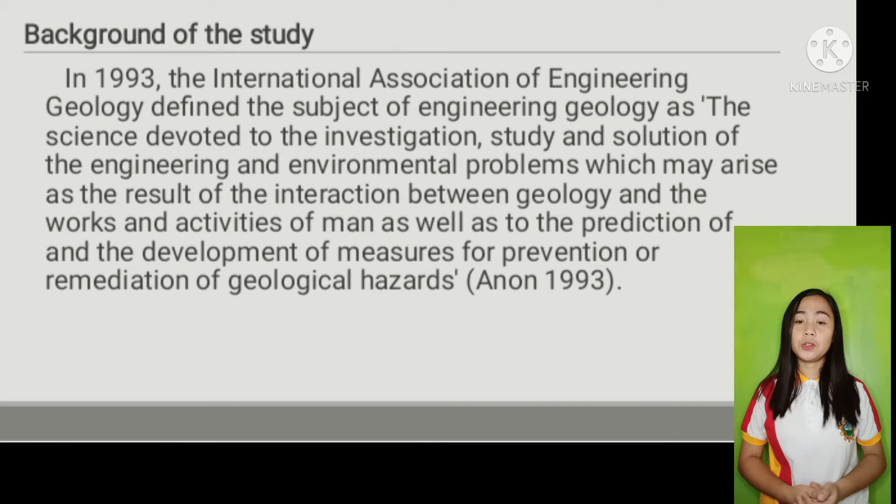The International Association of Engineering Geology simply says that this is all about the investigation of a particular conflict area and the study of its condition, and also coming up with the best solution of engineering, also the different environmental problems, as well as the activity of man, the prediction, and the prevention of geological hazards. In this case, it is very important that we have solutions to any geological hazards that arise.

So on the next slides, you're going to know more about geological hazards. The first topic is all about excavation. It is the action of excavating, o yung paghukay. It is formed through the development or construction of its foundations, tunnels, or underground.

The main importance of it is that the formation of excavation should be highly formed well, so its stability will stay at its most durable condition. So dapat matibay po, kasi once na hindi ganun kadurable yung slope, maaaring mag-collapse o gumuho.

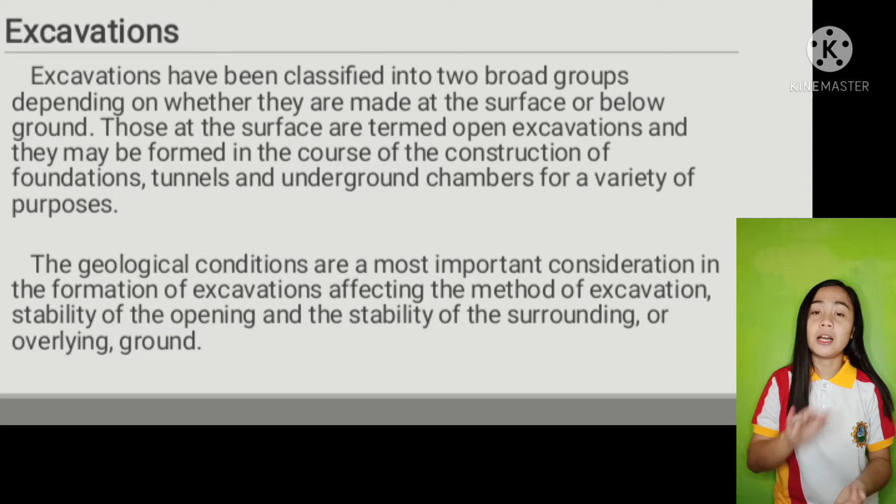So kailangan po na stable lang yung strength. According to Neil, it is specifically concerned with the ground conditions - yun yung pinaka-concern na yun sa mga grounds. So usually, in identifying hazard situations, yung mga panganib na pwedeng mag-occur that can cause harm during the excavation and construction, during doon sa pagko-construct ng excavation o yung paghuhukay ng lupa para mag-form ng slope o ng paggawa ng embankment doon. So all these concerns are related with the engineering geology.

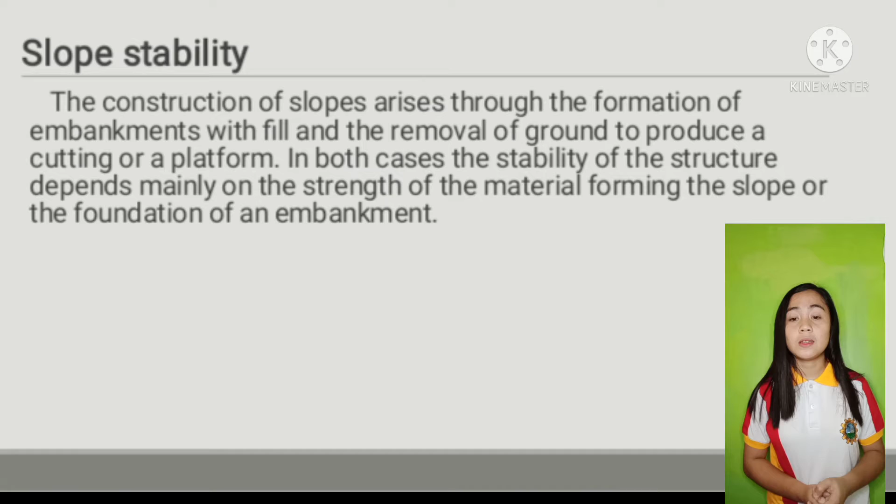Civil engineering works and construction industries mainly cover the functions, and the construction process in geology is very important. So the next topic is all about slope stability, from the word slope which is matarik o mataas, and from the word stability, for the things being stable.

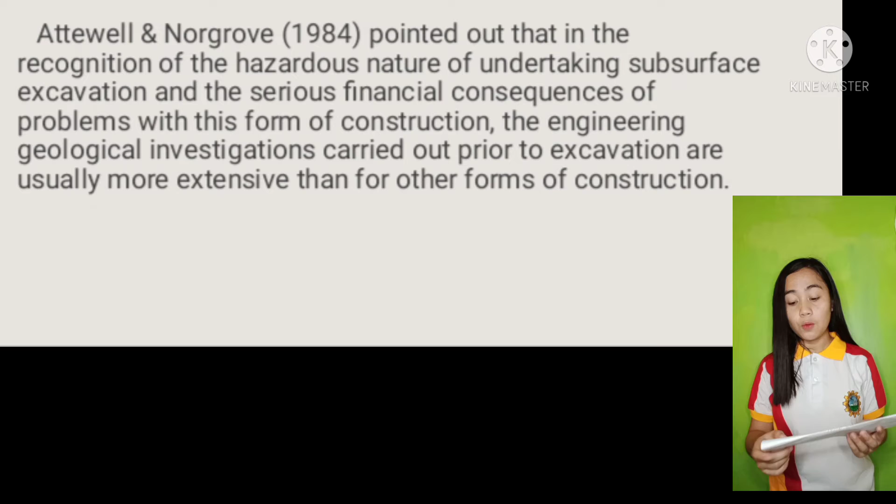So the construction of slopes arises through the formation of embankments with fill and the removal of ground to produce a cutting or a flat platform. Yung pag-construct nito is through the formation ng embankments o wall, yung nakikita natin sa gilid ng daan, yung mga matataas na part. Ito ay nagtataglay ng safety sa road na nagpe-prevent ng river flooding sa isang area.

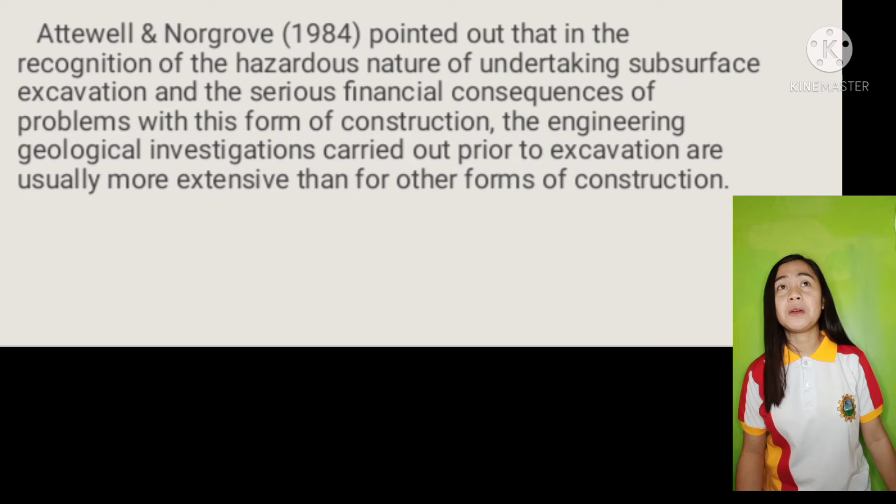Kinokontrol nito yung soil para maiwasan ang erosion o pagguho ng lupa, especially yung mga nasa gilid ng daanan na maaaring magkaroon ng harmful sa ibang tao. In forming the slope, dapat matibay yung pagkakagawa kasi nakadepende sa tibay nito yung foundation ng embankment para hindi mag-cause ng conflict o hindi gumuho yung lupa.

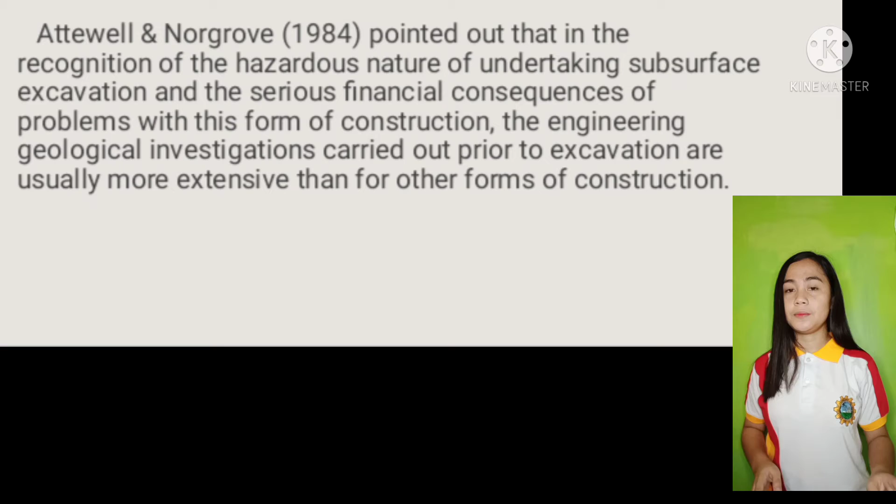For the method of excavation, the optimal excavation method for a given situation is determined by the ground characteristics, water conditions, and other elements related to the excavation sites. The equipment available for the actual process, as well as, if necessary, for sustaining the ground afterwards, may influence the decisions. There are two distinctions of excavation: the soft ground and the hard ground.

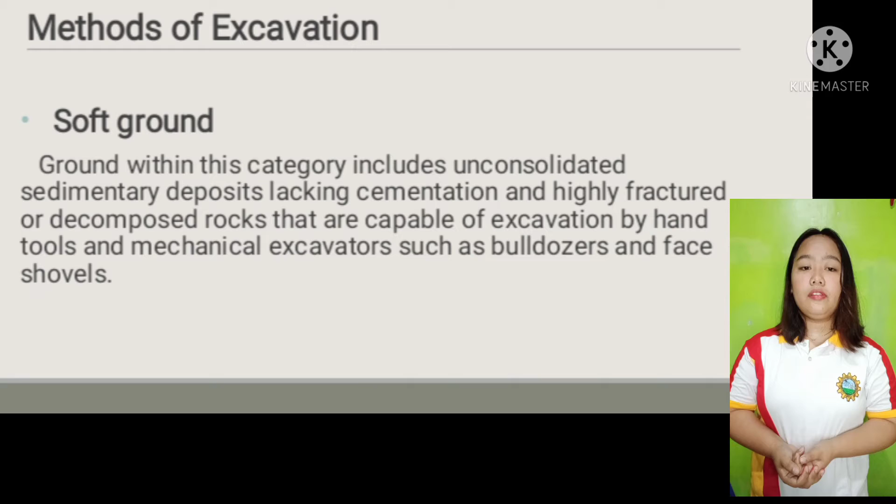For the soft ground, this category of ground includes unconsolidated sedimentary deposits lacking cementation, and highly fractured or decomposed rocks, which can be excavated using hand tools and mechanical excavators like bulldozer and face shovel. In this excavation, kailangan gumamit ng mga ripping techniques and other methods so that we can loosen the ground bago tayo mag-proceed sa paghuhukay.

Sa paghuhukay ng lupa, mayroong mga major importance sa pagpili ng mga gagamiting excavation equipment, and it depends on its strength, bulk density, bulk factor, and natural water content. But there is no generally accepted quantitative measure sa paghuhukay. The assessment is usually made according to the experience of the operator and to the behavior of the ground.

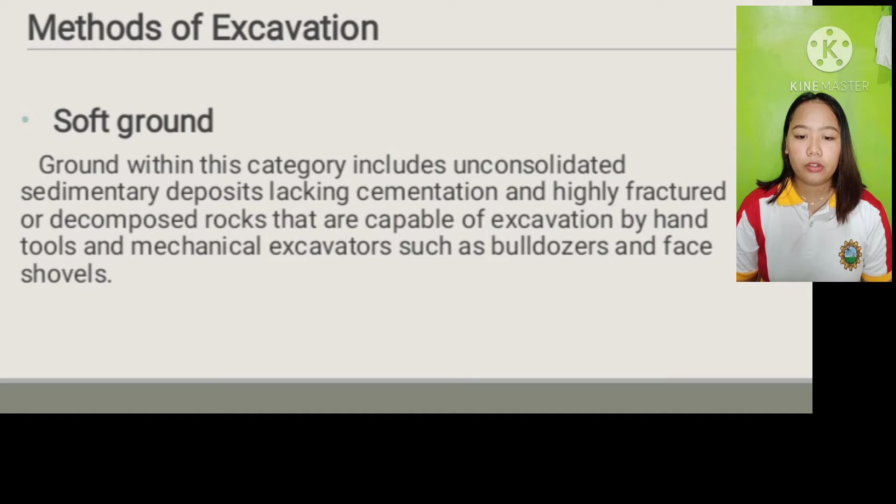According to Atkinson, the most common method to determine if a rock mass is capable of being ripped is seismic refraction. The practical limit for ripping is a seismic velocity of about 2 km per second. On the other hand, light blasting or hydraulic fracturing may cause a stronger ground to make it ready for ripping.

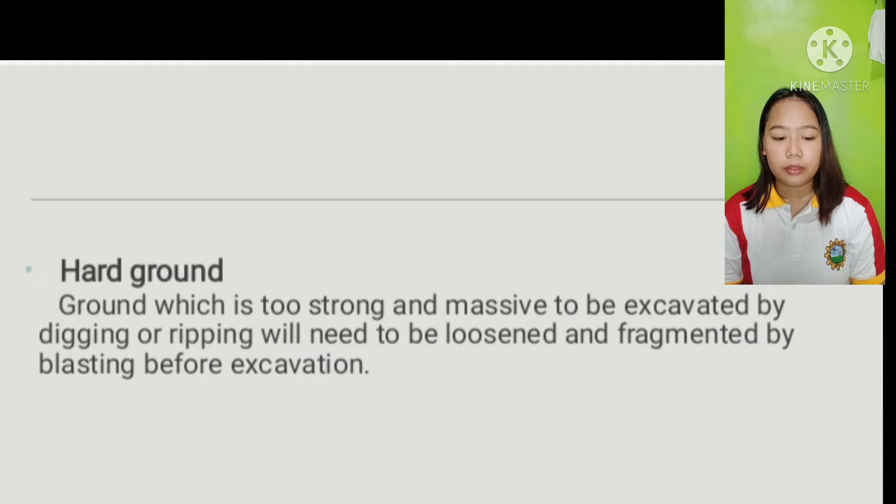Next is tunnel. Tunnel construction necessitates a significant amount of geological input. Maintenance of excavation stability, surface subsidence, as well as difficulties with excavation operations are all construction issues. The linearity of tunnels complicates the examination of the ground prior to construction. This is critical because even minor deviation from projected geological conditions can create delays and increase cost because the structure design and excavation and support methods will not be optimal.

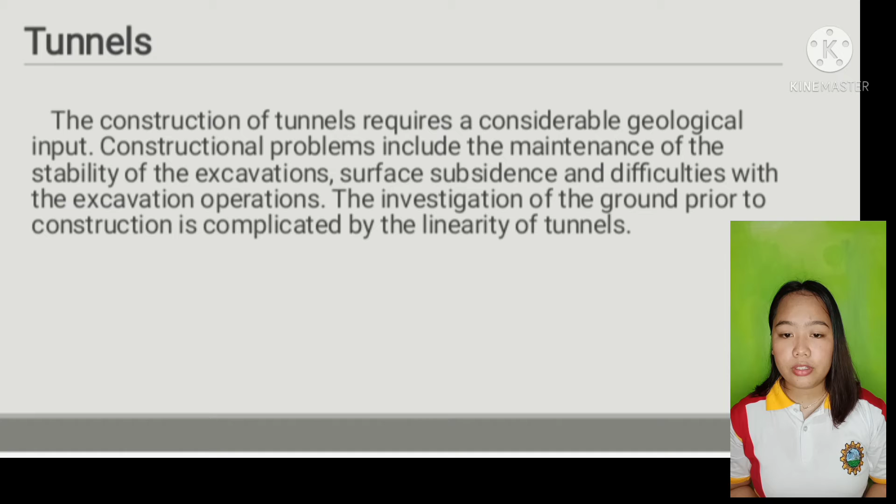Difficulties may also occur as a result of the presence of materials having unusual negative characteristics. For example, some rocks disintegrate easily during excavation, and the resulting slurry can be difficult to remove from the excavation if the circumstances are damp. When undesirable features run parallel to the tunnel alignment rather than crossing it at a steep angle, the situation is generally more serious.

For machine tunneling in hard rocks, mechanical cutting using tunnel boring machine or blasting is used. The performance of the tunnel boring machine is more sensitive to changes in rock properties than conventional drilling and blasting techniques. Aside from ground stability and support, cutter wear rate and penetration rate are also important economic factors in machine tunneling.

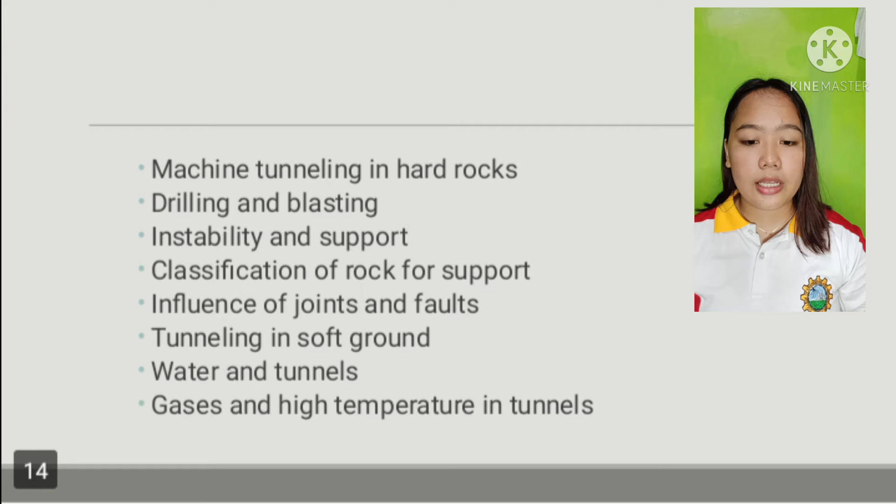Drilling and blasting may harm the rock mass depending on the qualities of the rock mass and the blasting techniques used. This may increase the need for ground support, also the amount of water that enters the excavation. This can be a reason for compromising the stability of what is being excavated.

Next is instability and support. The length of time that an unsupported rock mass can survive in a tunnel is mostly determined by the size of the stresses within the unsupported mass.

The size and shape of the tunnel in relation to the intact strength of the rock mass, the nature of the discontinuities, the geostatic stress regime, degree of overbreak, the groundwater pressure, the method of excavation, the length of time before placing the permanent lining, and the stiffness of the lining system, all influence rock pressure on the tunneling.

For the classification of rock for support, the classification of rock masses allows the determination of the most appropriate method of excavation for the rock mass in question, as well as the design of the kind of tunnel support. This classification is based on the fundamental qualities of the rock mass, and it must be relevant to both drill hole core and direct observation of the rock mass.

The rock mass quality, together with support, pressure, and dimension, and purpose of the underground excavation, are used to estimate the type of suitable permanent support.

The next one is influence of joints and faults. If the orientation and type of the discontinuities are outside of the expected ranges, unexpected instability may emerge. Overbreak can cause issues such as excessive handling and the need for backfilling. But instability can also be a hazard during construction.

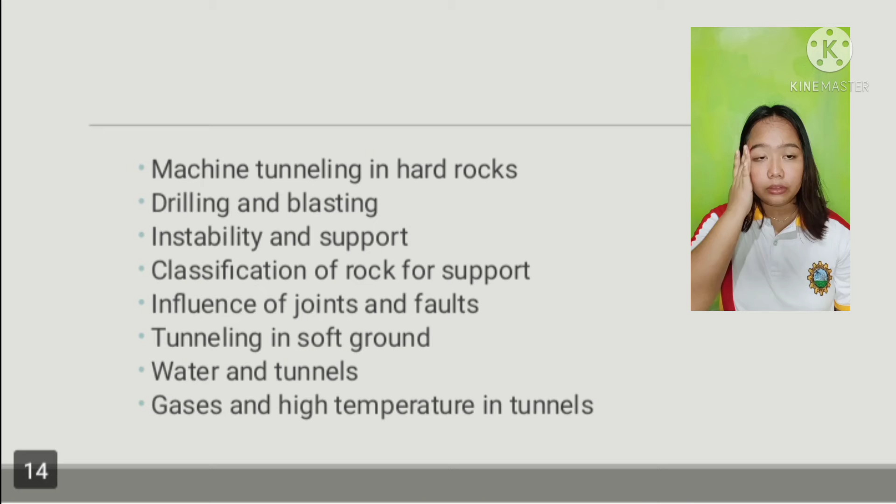Next is tunneling in soft ground. In soft ground, immediate ground support is critical. Hence, tunneling is normally done with a shield. This shield is a cylindrical drum with a cutting edge around the circumference that is pushed forward as the digging progresses. The excavation can be performed by either manual or mechanical means.

The next one is water and tunnels. Tunnels and other underground openings in water-bearing ground face numerous challenges.

It is vital to guarantee that sufficient pumping capacity is available to deal with the continuous input of water in excavation, and any sudden and unexpected water inflows that would result in flooding.

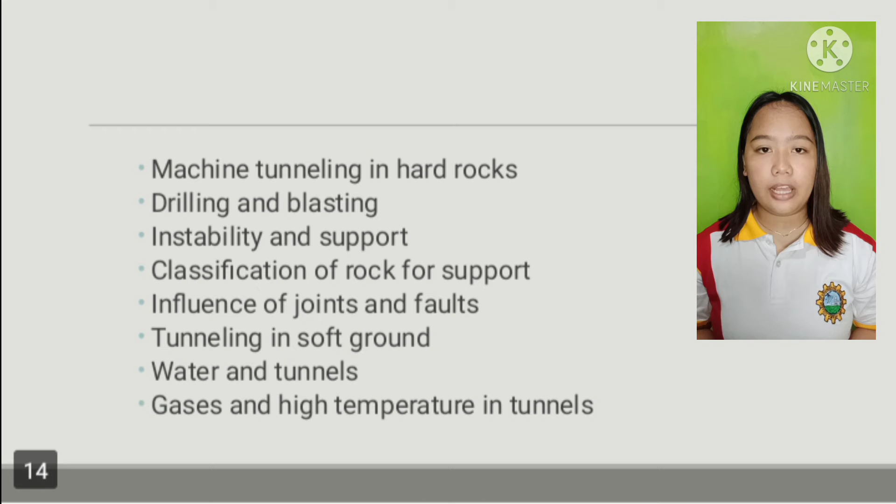Measures to control water infiltration, such as general lowering of groundwater levels in the area and ground treatment, may be done if the flows into underground excavation are excessive.

The last one is gases and high-temperature tunnels. The pore spaces in rock can be occupied by naturally occurring gas. If this is kept under pressure, it may rupture into subsurface workings, triggering explosive rock failures. Maraming gases na magiging hazardous if they come into contact with tunneling equipment.

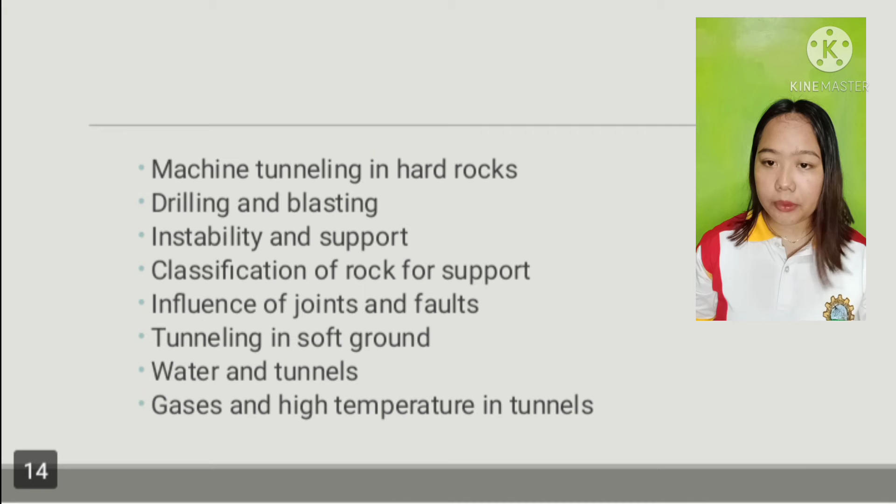For example, methane is an inflammable and explosive gas that occurs in many formations, including coal measure strata. Also, other examples of gases are carbon dioxide, carbon monoxide, sulfur dioxide, and hydrogen sulfide, which are toxic and very hazardous.

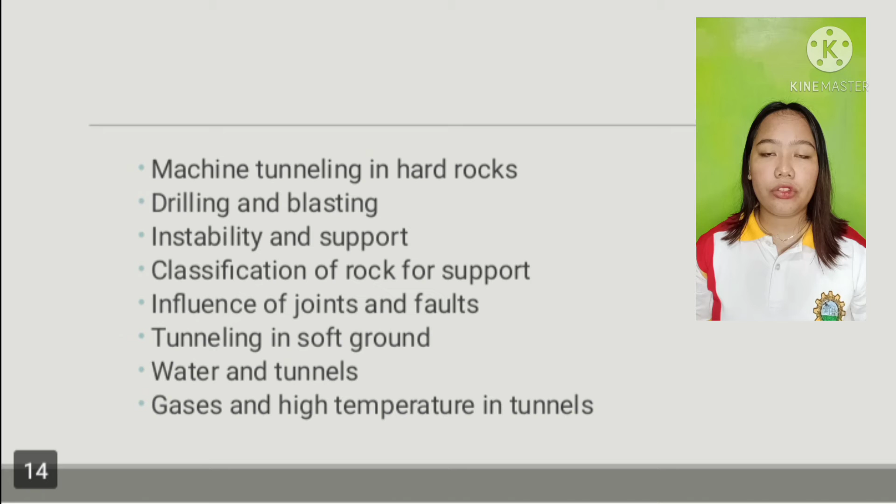As we proceed, the foundation is the most important part, as it carries the weight of the entire building. Foundation keeps the building up when the forces of nature try to take it down, and it needs to be built well. There are things to consider in building a foundation.

First is the waterlogged ground. As we know, building in a waterlogged area is not the best choice. And if it can't be helped, an engineer needs to be aware of the dangers it represents, because as the water seeps into the foundation, it will get weaker, which will lead the building to collapse.

Next is soil condition, as different types of soil can break or make the foundation of a structure. For example, loam, rock, and sand gravel foundation are friendly soils, while peat, clay, and silt are bad options because they tend to change their structure or shift, which can cause cracks in the foundation and weaken the whole structure.

Third is erosion of the ground. It needs to be taken into account when designing the foundation because erosion of the ground can cause shifts and mess with the structure.

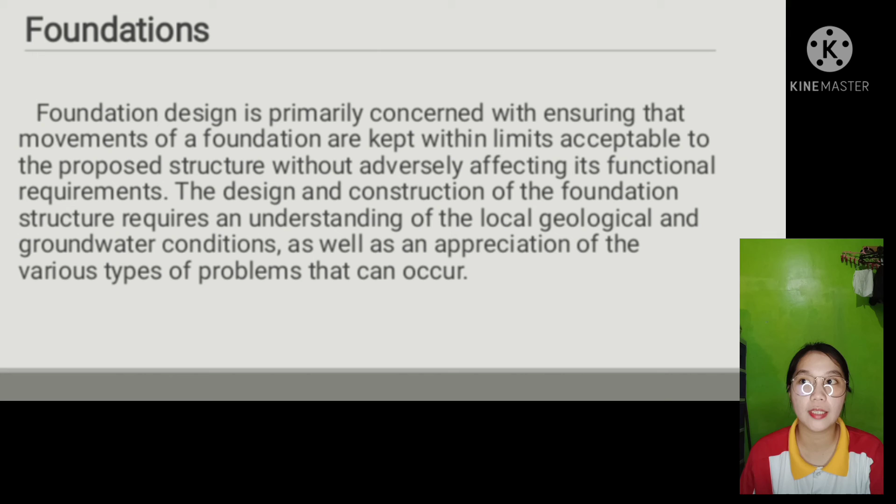Followed by the effects and after-effects of construction itself. Construction itself has an effect on the ground, for example vibration from the piling or changes made in excavation. That's why site inspection is needed before and after construction starts.

Also, cost and speed need to be considered. It can be lessened by hiring a reliable and experienced contractor.

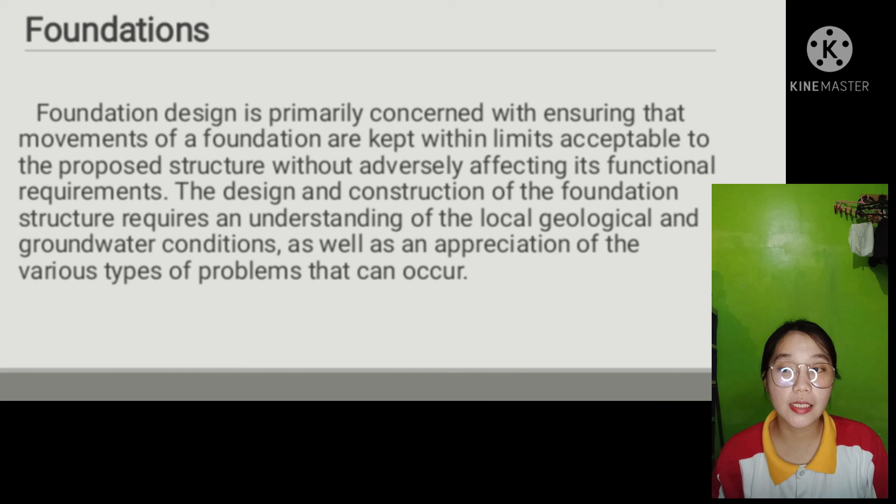Last is the effects of construction on the adjoining structures. If works threaten surrounding buildings, you or the contractor may be held accountable and can be prosecuted. Excavation, dewatering, and vibration are similarly harmful effects.

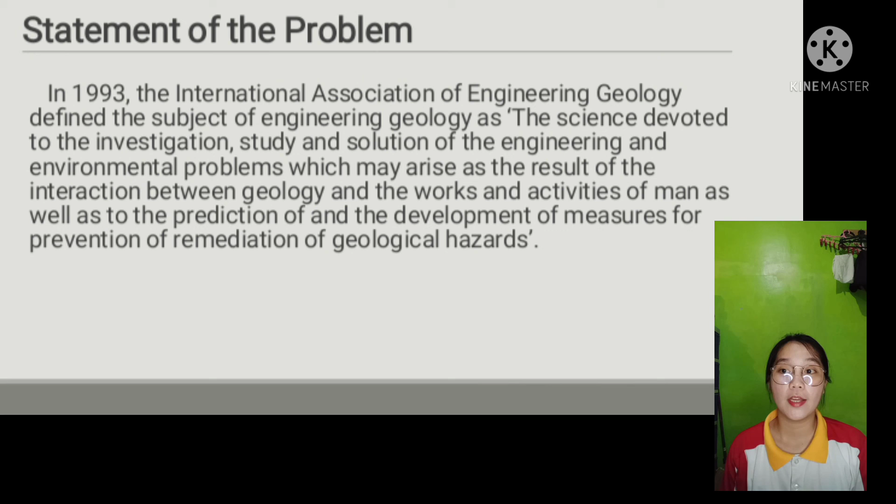For the statement of the problem, the study implies that the significance of engineering geology to construction is needed to minimize catastrophic events as a result of man's impact on the ground, concerning the impact of contamination and waste disposal.

For the methodology, the author did not include a methodology, as the study focused on the significance of engineering geology to construction.

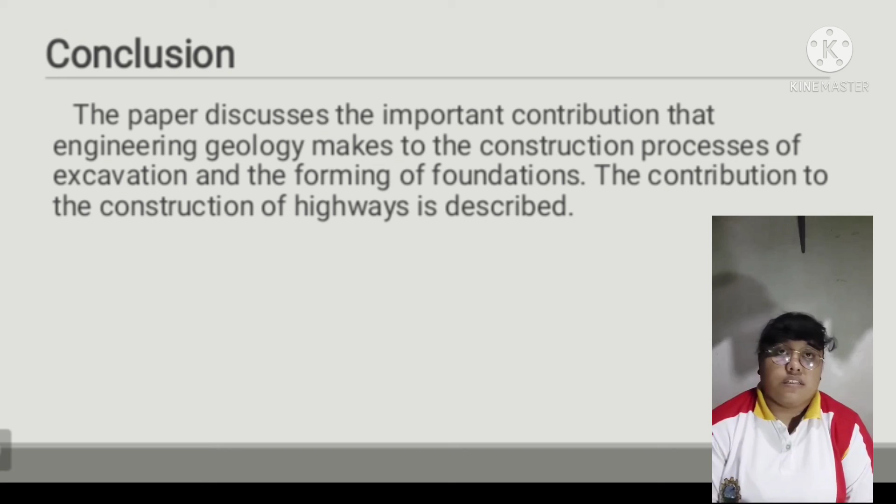Next is recommendation. Any possible problem should be given adequate attention during the site investigation stage. There should be effort to acquire the required information for the design of structures, because leaving uncertainty about engineering geological conditions can lead to overly optimistic views of the ground conditions being taken. So if the risk of delay during construction is very high, it can be justified.

So, conclusion. This paper discusses the important contribution of engineering geology in the process of excavation, particularly the influence of geology on cut slope stability, soft and hard ground excavation, bearing capacity, settlement, subsidence, and foundation type are all considered. Also, the problems associated with the use of fills and waste materials are mentioned.

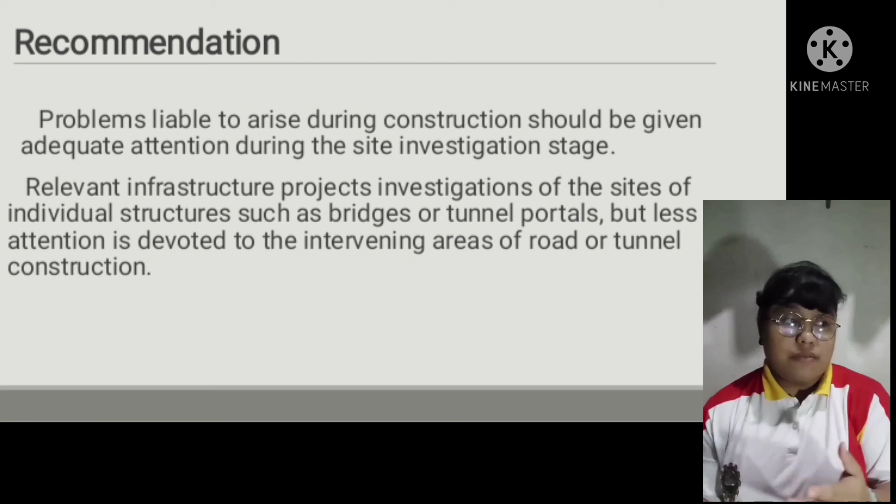So, the contribution of engineering geology helps in pointing out the possible problems that will arise in the interaction between geology and the works and activities of men, as well as in preventing geological problems.